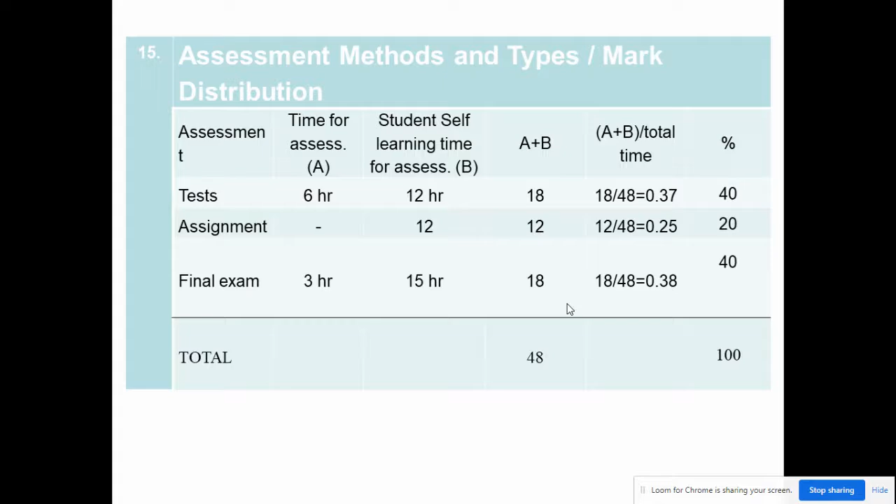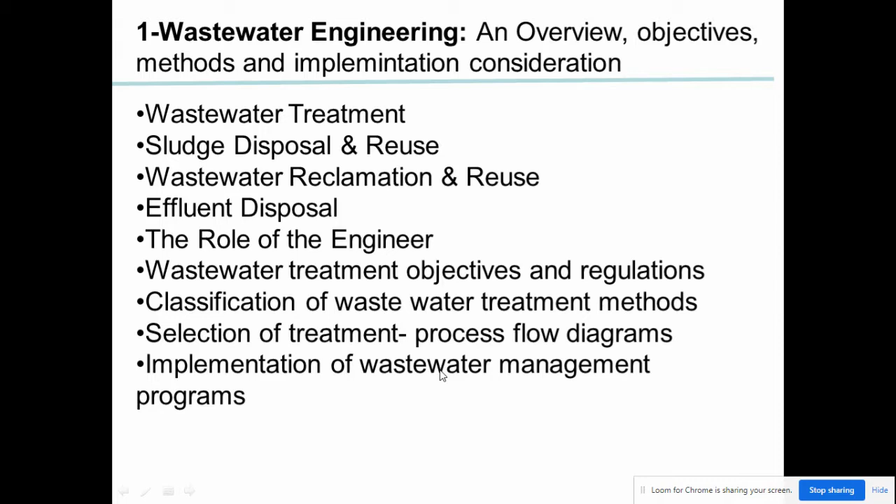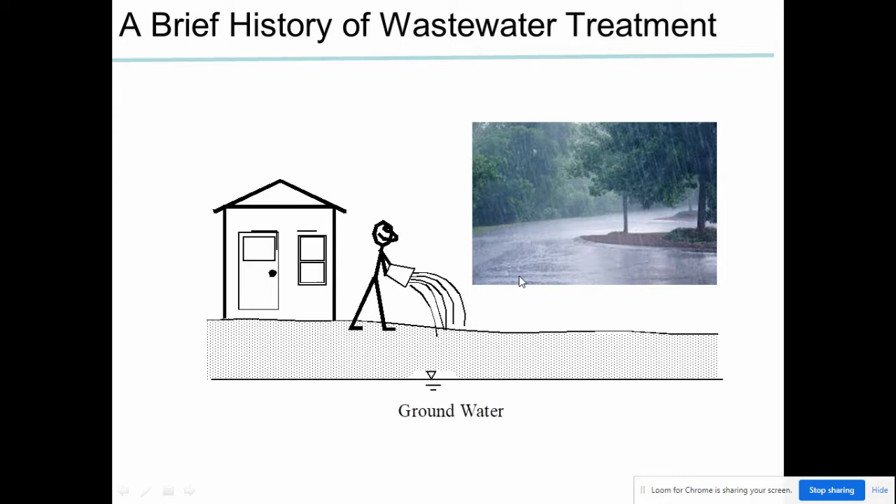In the past, for small villages and small communities, when a small amount of sewage was discharged into the open environment, the natural process of stream self-purification occurs. That is normal. The main idea is that dilution will occur, and the small amount of waste will not be a big issue because biodegradation or photodegradation will do the job.

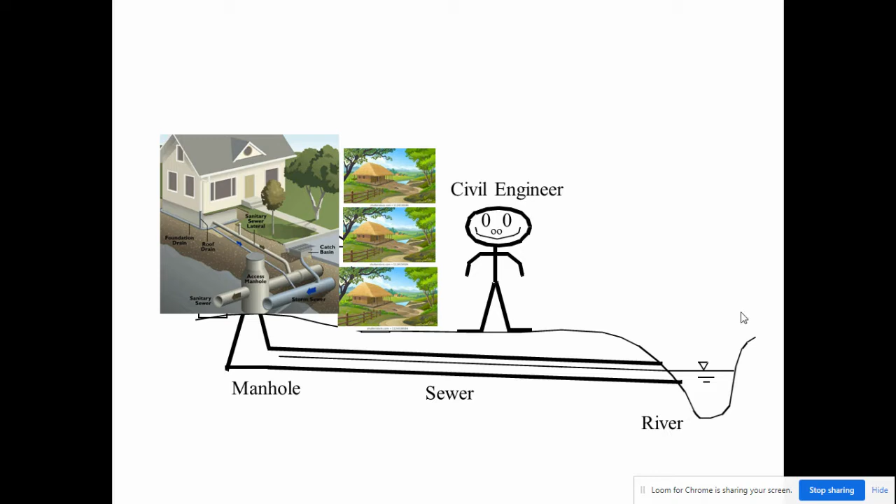However, in a big community, like what we have here, for example a big city, dilution will not do the job. So we need to make a sewage system, and this sewage system will be designed by a civil engineer. The job of this civil engineer is to lay out the design and figure out how to bring this waste from homes to the river, to the sea, or to the wastewater treatment station. After that, his job is already finished. Starting from there, he's very happy that his job is done.

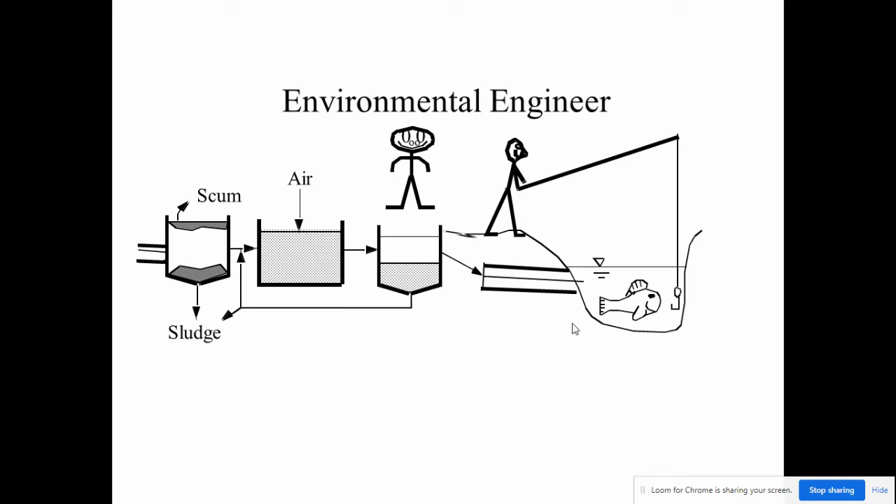But the environmental engineer will think about how we can treat this waste, what units are needed, what kind of waste, and based on that, how we can select the suitable treatment method. Finally, we will get clean water that is eco-friendly and can be used, no problem, because we already removed all toxic components and it became safe for disposal. Okay, now we define the beginning.

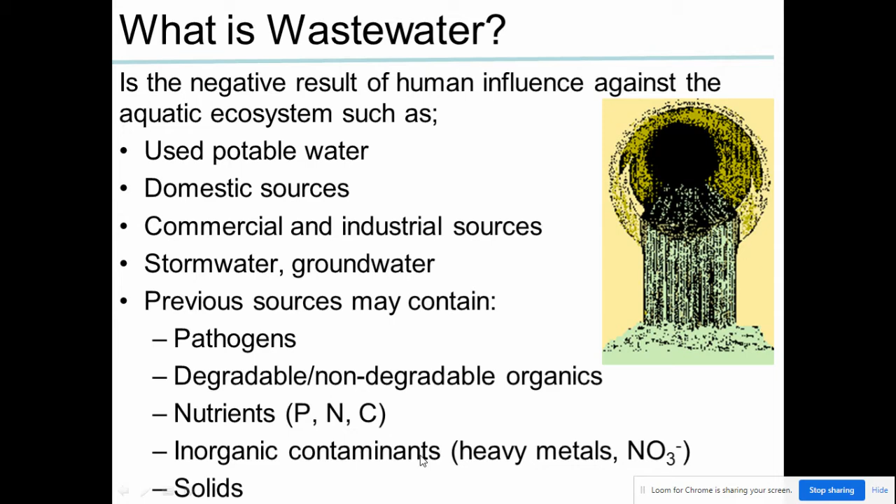Examples: used potable water, domestic sources, commercial and industrial sources, storm water, groundwater. These previous sources may contain pathogens like bacteria, viruses, and we have a big virus now, COVID-19. That is a big issue; we cannot meet because of that. They may also contain degradable and non-degradable organics, and nutrients like P and N, which usually come from food waste. Also inorganic contaminants like heavy metals, NO3, nitrite, nitrate, and ammonia, and other than that, solids as well.

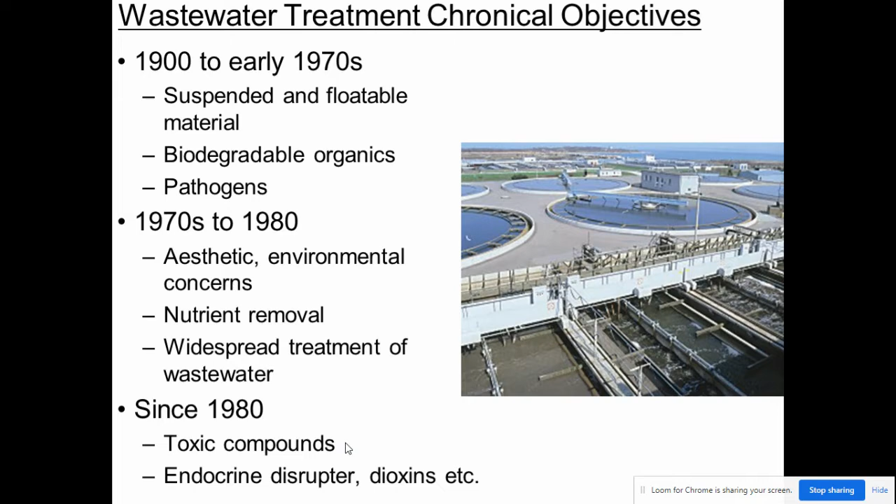Now we are trying to solve the problem of COVID-19. This is also maybe somehow an impact from environmental problems. Impact on environment includes pathogens, drinking water, bathing, oxygen depletion. We will talk about this because it causes eutrophication, especially in sea water, turbidity, silt buildup in receiving water, and toxicity to ecosystems and humans.

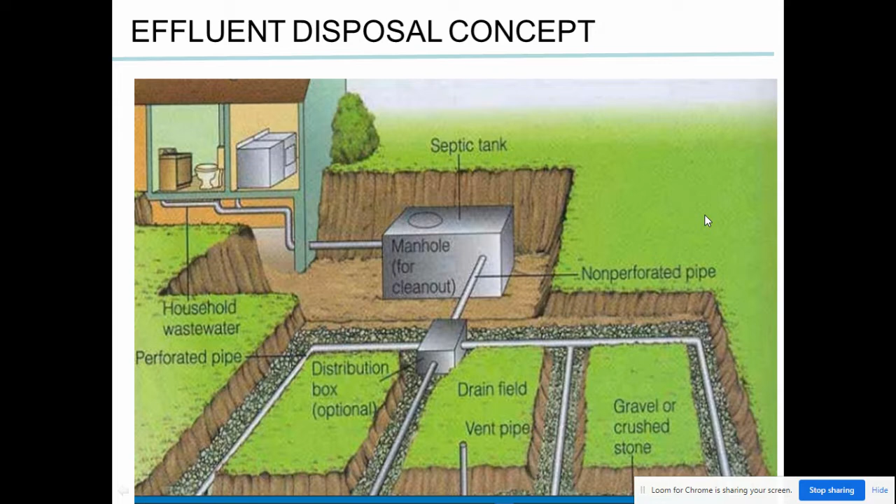Let me define for you the effluent, how it looks. When we are talking about effluent, we are talking about, for example, a septic tank in homes in a village. This is all underground. Waste coming from home, from kitchen, from toilet, whatever, goes to the septic tank, the main one. So here will be the effluent, and after going out, this will be the effluent. Because it is covered underground, it will be treated by microorganisms, or biodegradation. For small amounts, it's not a big issue because of filtration and everything in the earth crust, and then it goes to the underground water somehow clean, because small amounts have dilution at every stage, so it's not a big issue.

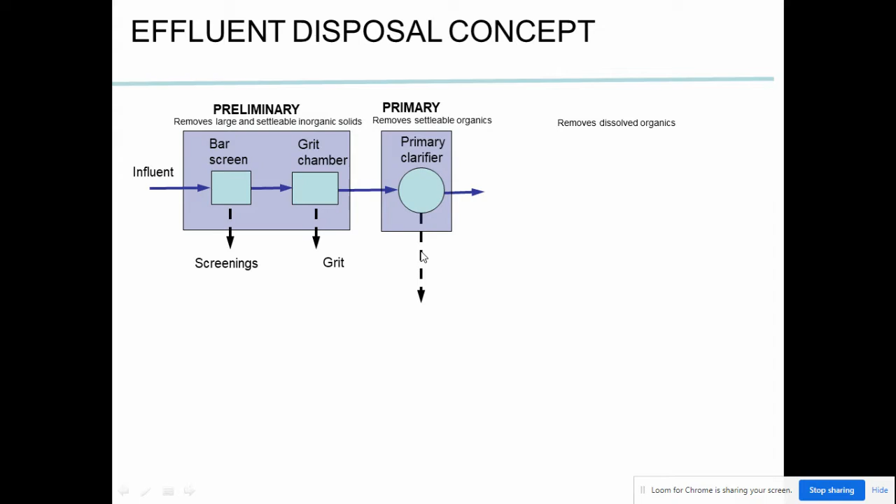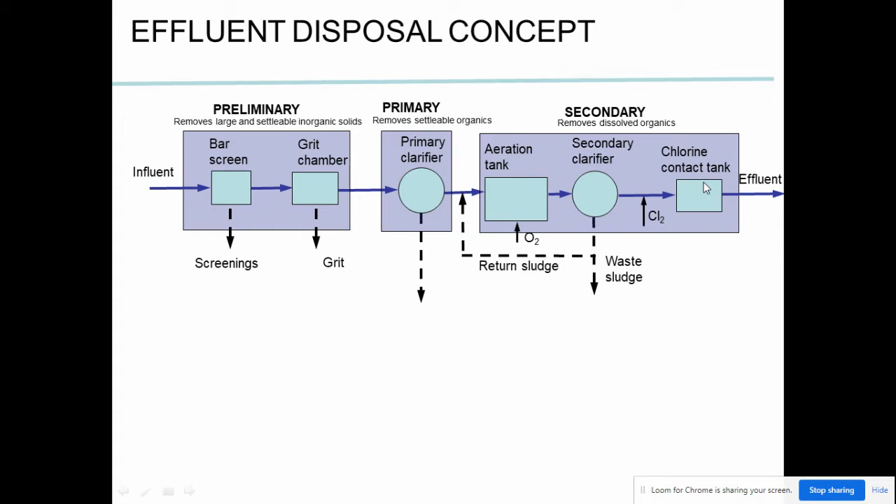Then we go to the primary clarifier. In the clarifier, we take out the solids and release the water. Then we go to secondary treatment. Secondary will be before aeration, maybe there is some coagulation. Coagulation, if there is suspended solid, will gather and precipitate. After that, we go to aeration. This is aeration, where we add oxygen. This oxygen is very important for bacteria to use and consume organic compounds and then produce gases, but this will form sludge. Then it goes to the secondary clarifier, and finally to chlorine as disinfectant, and then effluent.

Here sludge will be treated also. Finally, we get dewatered sludge. This dewatered sludge, if it is from food waste, can be used as fertilizers. Part of this clean water will go back recycled because it is rich with bacteria, which is very important, and there is some sludge here rich with bacteria to go for the aeration tank.

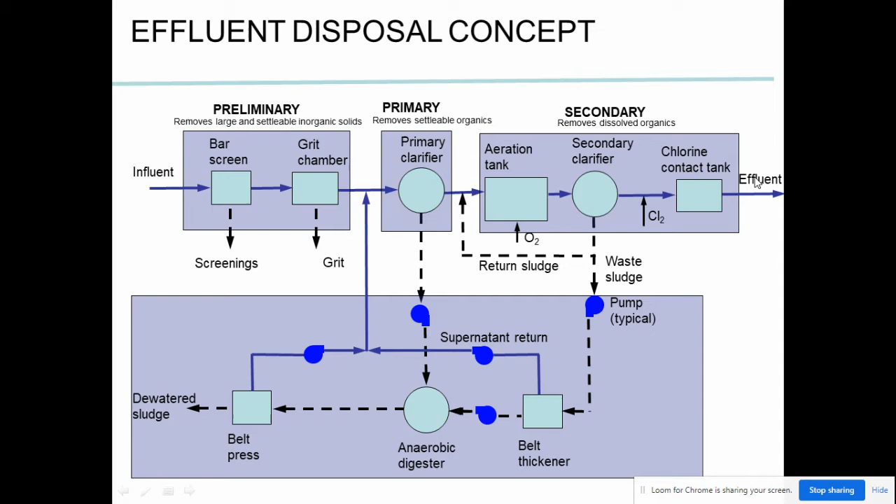Hopefully you understand what is the meaning of influent and effluent. Influent is the entrance of the waste or stream of waste at the beginning before treatment. Effluent is the stream of water after treatment.

We go to the very easy, simple activated sludge process, which is usually used in wastewater treatment. Waste comes from homes or industry and goes to a big tank or reservoir. Then we inject air by pumping it in, and aerobic digestion happens there. Bacteria do the job of eating hydrocarbons and other components, so gas is released, and then sludge is also formed.

When we bring it to the clarifier, we separate sludge from clean water. If this sludge, as I mentioned before, is rich with nutrients like hydrogen, phosphate, and nitrogen, then it can be used as fertilizers.

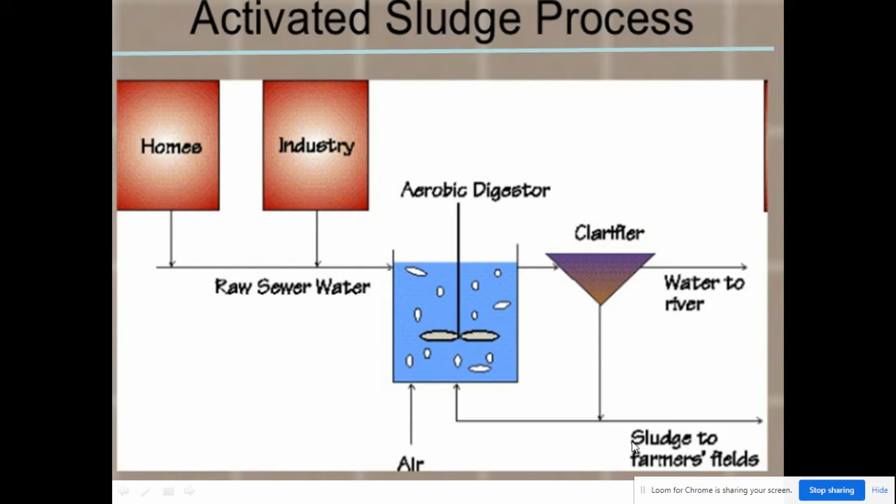Wastewater reclamation and reuse. Reclamation of water is the process of converting water or wastewater into water that can be reused for other purposes. Reuse may include irrigation, industry, aquaculture, etc.

In many locations in the world, available water or fresh water became inadequate to meet water need. Therefore, this water is collected and used one more time. In this case, we don't consider this as waste, we consider it as a resource that must be reused.

Especially in the Middle East and Africa, we have shortage of water, so this will help at least in irrigation and other purposes.

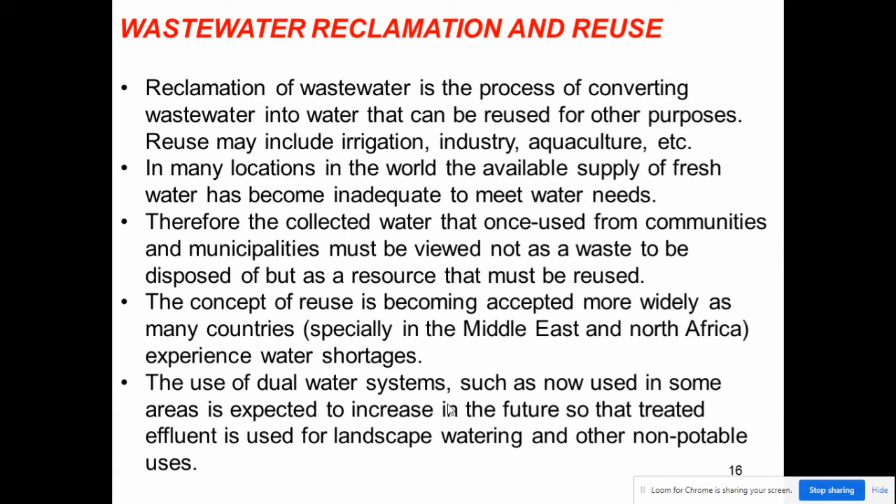The use of dual water systems, such as now used in some areas, is expected to increase in the future, so that treated effluent is used for landscape watering and other non-potable uses. Potable means drinking, so this is not for drinking.

There are different methods for wastewater treatment. Here, at least you have 5 wastewater treatment methods. This is mainly for water coming from the river or from underground to drinking water for the houses. The methods are very easy, as you see here. We will talk about each one in detail.

Second one is wastewater treatment. Number 3 is advanced wastewater treatment, and then recycled water, and then water reclamation.

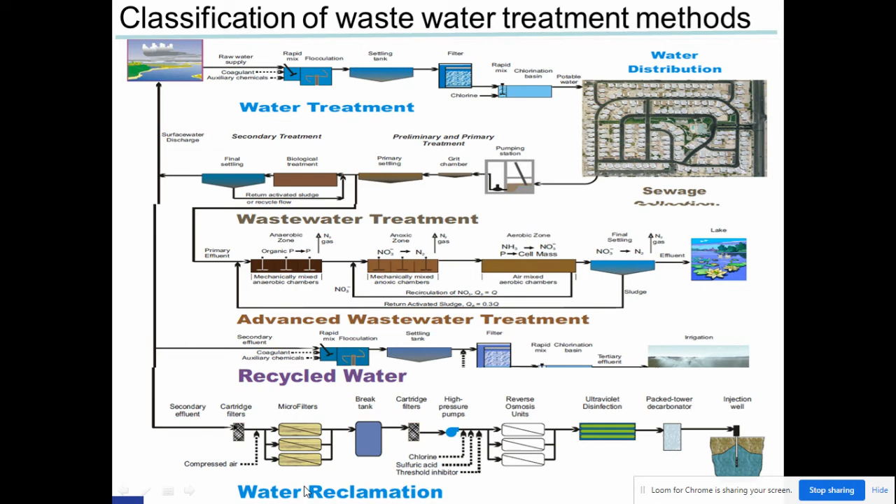The first one, water treatment from river to homes, is very easy, not difficult, because here we take water by pumping and then add coagulant. This coagulant, if there are any nanoparticle sizes, will become big and precipitate. After that, it goes to the settling tank where we separate sludge from clean water, then goes for more filtration, and after that chlorination or disinfection process. This means we are sure it doesn't contain any bacteria or viruses, and then it goes to the homes.

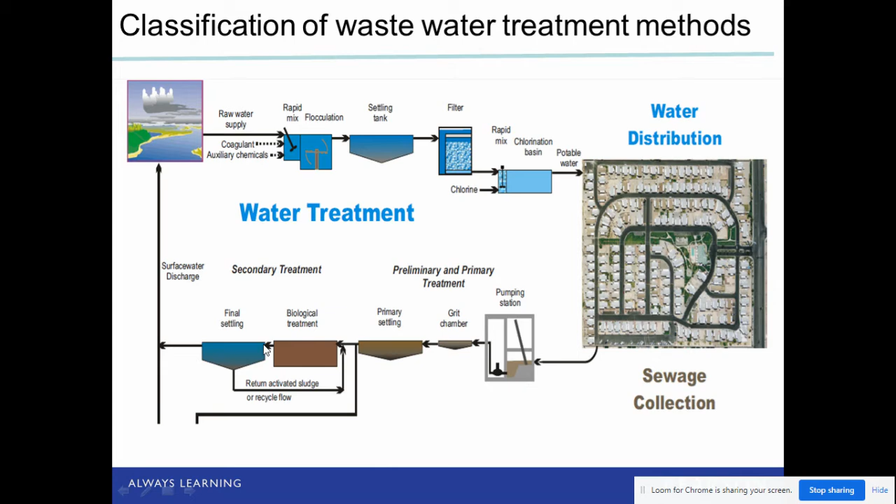Waste coming from here must be treated through the grit chamber, then primary settling, then biological treatment. Biological treatment is either aeration, which we call aerobic, or anaerobic. Aerobic, we add air; anaerobic, in the absence of air. Then final settling, and then it goes to the river or to the sea.

In wastewater treatment, we have an anaerobic zone where bacteria will utilize the contaminants and produce nitrogen. Here also anaerobic, because some bacteria will act as anaerobic, other bacteria will be like aerobic. And there is also anoxic. What is the difference between aerobic, anaerobic, anoxic, and oxic? We will talk in detail in the next chapters.

Then here is the aerobic zone, where oxygen will be utilized from air, because here we have NH3. But in anaerobic, it means we utilize the oxygen in the compound itself, so it is in the absence of oxygen. Finally, after nitrogen removal or phosphorus compounds and sludge removal, we can release it to the open environment, after we check that there are no heavy metals and other components.

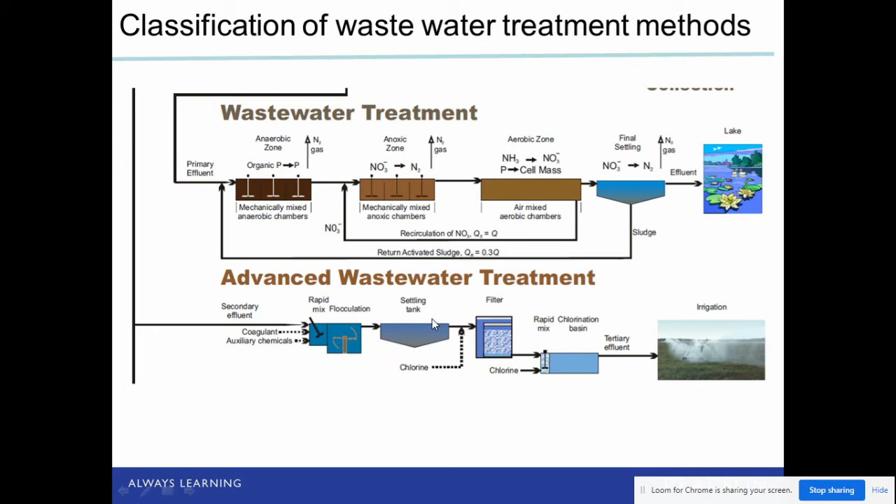Here, advanced wastewater treatment is also somehow similar. It is not a big difference, but here it is more complicated.

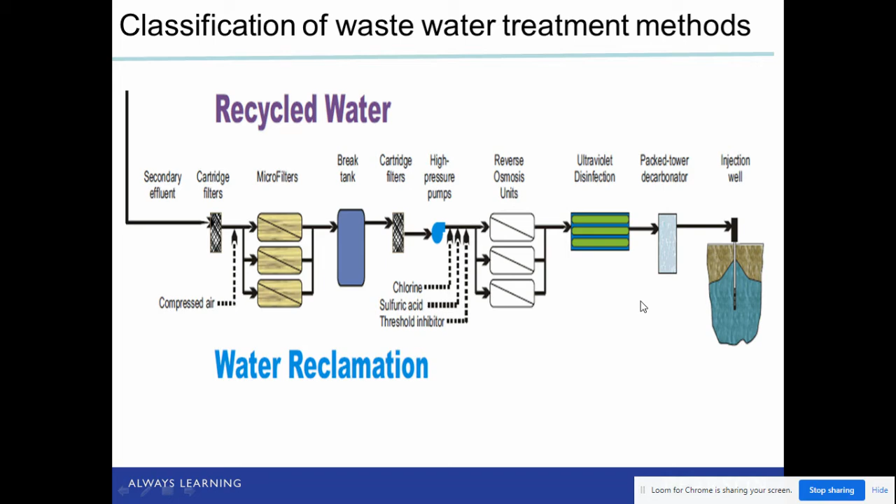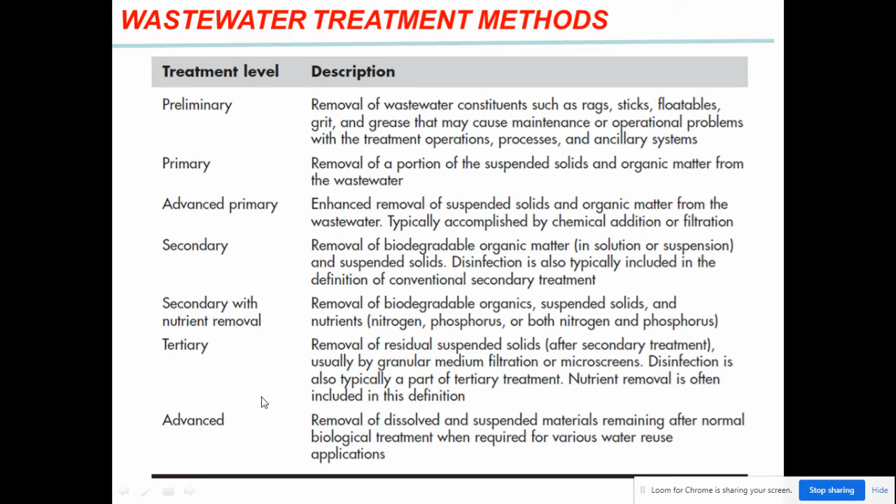Preliminary or primary will be mainly for physical treatment. Advanced primary is also like nano, for nano-sized particles, very small. Then secondary will be here - secondary will be chemical, adding coagulant or whatever. Then secondary with nutrient removal, we have to add bacteria and other things. Then to advance, it means microfiltration, nanofiltration, so that we make sure there are no contaminants in the drinking water.

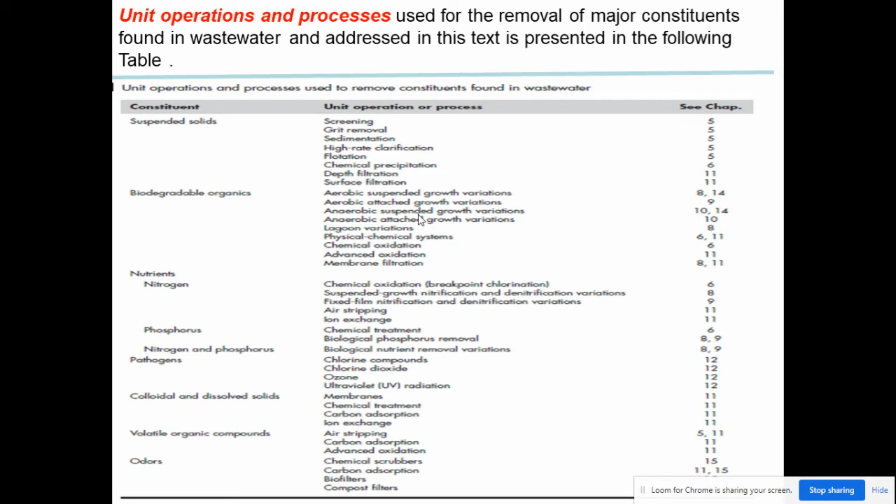Of course, there are different processes, there are different unit operations. This is just for knowledge, to understand that there is no one method for treating all kinds of waste. Depending on the waste, we have to select the suitable treatment method.

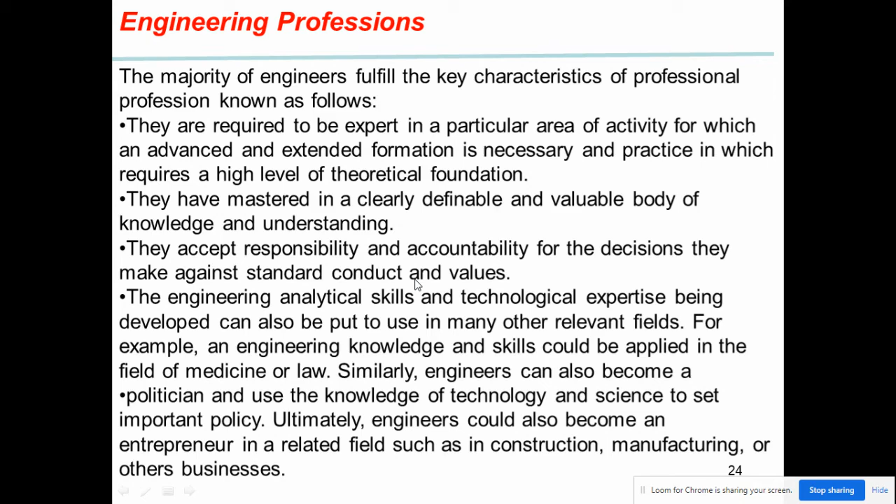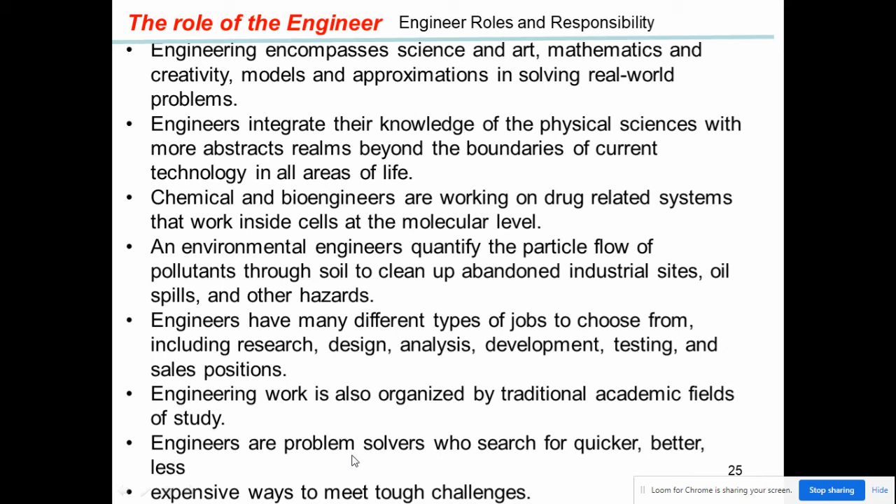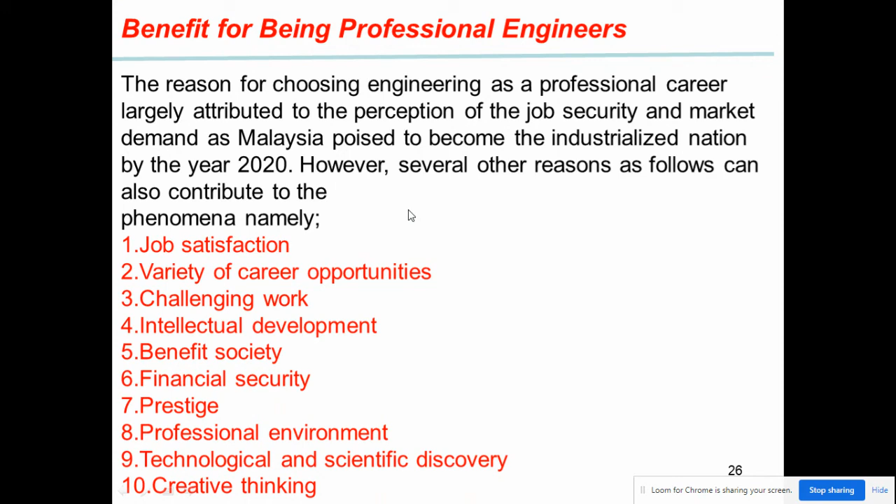So you work in a very good way so that you can achieve your job satisfaction. Okay, thank you very much for the time used, and hopefully, inshallah, we see you in the next slide.